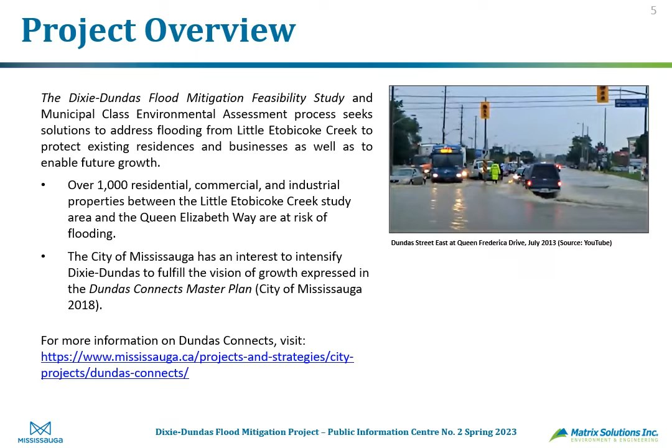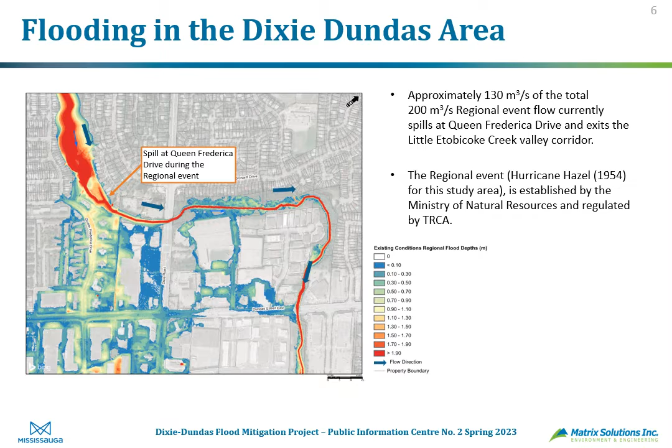During a regulatory event, the extent of flooding associated with a spill from Little Etobicoke Creek is shown on the map to the right near Queen Frederica Drive. The flooding extent shown on the map was determined and detailed through regional flood mapping, which is dictated by the Ministry of Natural Resources and Forestry and regulated by the Toronto and Region Conservation Authority. The analysis indicates about 1,000 residential, commercial, and industrial properties are at significant flood risk during the regulatory storm. As well, this flood risk was only mapped as far as the QEW. Flooding is anticipated to continue beyond the QEW, further south, to make its way out to Lake Ontario.

The objectives of the Dixie-Dundas Environmental Assessment Project can be summarized in a statement. Residents and businesses in the Dixie-Dundas community are currently highly vulnerable to flooding from Little Etobicoke Creek. The Dixie-Dundas Flood Mitigation Feasibility Study and Class Environmental Assessment will assess solutions to provide flood protection to residents and businesses, as well as enable future growth. It is our hope that the environmental assessment achieves the following objectives: address riverine urban flooding issues, protect and enhance a natural environment, build resilient and adaptable solutions, plan and design feasible infrastructure solutions, and enable growth and development.

Two-dimensional modeling to define the very complex flooding that occurs in the Dixie and Dundas areas began as early as 2012 and was completed around 2015. In July 2013, a significant flooding event did occur in the Dixie and Dundas areas, highlighting the need for further understanding of the potential flood extent. An expansion of the initial two-dimensional modeling to define flooding from the Dixie and Dundas areas down to the QEW was completed as part of the Little Etobicoke Creek Flood Evaluation Study and Master Plan in 2018. This led to the current project, the Class Environmental Assessment, which began in April 2019.

Matrix completed the feasibility portion of the project between April 2019 and July 2020, and the first PIC was held online in August 2020. As the project evolved, there was a need to expand the study area. That brings us to where we are today, which is PIC number 2.

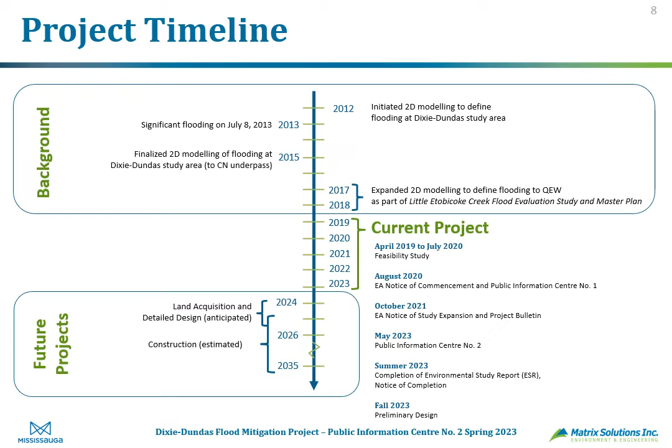There are many components of construction that are set to begin in 2026 that are estimated for completion by 2035.

This slide outlines the municipal class environmental assessment process, specifically the 5 phases associated with the process. Currently, the Dixie-Dundas Environmental Assessment Project is in Phase 3 of the Schedule C Municipal Class Environmental Assessment process. The project team has developed alternative design concepts for the preferred alternative solutions selected during Phase 2, and has decided on a preliminary preferred design solution based on the evaluation criteria.

The main intent of this PIC is to explain the alternative design concepts and the preliminary preferred design solution in order to gain feedback.

Following this PIC, the project team will complete an environmental study report that will summarize the entire process and the inputs into the process, which is Phase 4. The preliminary design, as outlined earlier, is anticipated to begin in the fall of 2023, which is Phase 5.

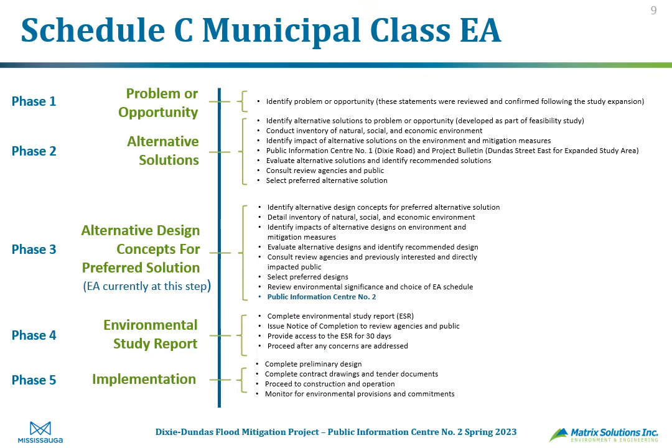There have been 2 points of public feedback leading up to this PIC. PIC number 1 was presented in August 2020 and introduced the project and the identified problem, described the environmental context, presented alternative solutions to address the problem, outlined the evaluation criteria, and provided opportunity for interested parties to offer input.

A project bulletin was released in October of 2021. The bulletin outlined the need to expand the study area for the environmental assessment, as the solution to mitigate the flows in the Dundas area could have the potential to cause flooding further downstream. The project bulletin described the environmental context of the new expanded study area, presented alternative solutions to address the secondary problem, outlined evaluation criteria, and provided opportunity for interested parties to offer input.

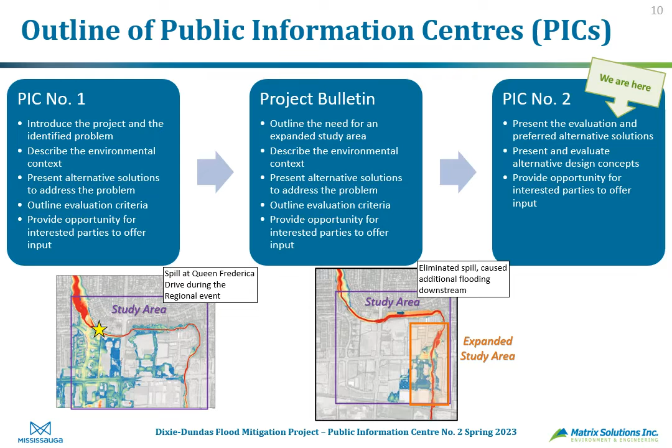Now, at PIC number 2, we will present the alternative design concepts, how they were evaluated, the preliminary preferred design solutions, and provide opportunity for interested parties to offer input. We will now review the alternative design solutions and how they were evaluated for the Dixie and Dundas areas.

Here is a recap of the alternative solutions that were presented in PIC number 1 and the project bulletin. For the Dixie area, each alternative solution represents a different approach to maintain flow within the Little Etobicoke Creek Valley Corridor, combined with the replacement of the Dixie Road Bridge.

Alternative Solution 1, Improved Conveyance with a Minimized Footprint, includes a concept that creates a narrow and deep channel through the Dixie area. The channel top width would not be increased, however the upstream 600 meters of channel would be lowered by 1 meter on average. The Dixie Road Bridge would be replaced with a single-span 26-meter bridge.

Alternative Solution 2, Improved Conveyance by Making Room for the Creek, is modeled on natural channel design concepts, with a widened channel and lowered adjacent ground to create a much wider and better connected floodplain. The channel top width would increase, and the channel depth would be lowered along with the surrounding areas to better connect the floodplain. The concept of Alternative Solution 3, Flood Containment with Mitigation for Upstream Impacts, is to contain the regional event within the Valley Corridor using a flood protection landform, known as an FPL.

The FPL would extend from approximately 500 meters upstream of Dixie Road to 700 meters downstream of Dixie Road. This option would require quite a wide footprint area due to the shallow slope on the dry side of the FPL. Alternative Solution 4 is to do nothing.

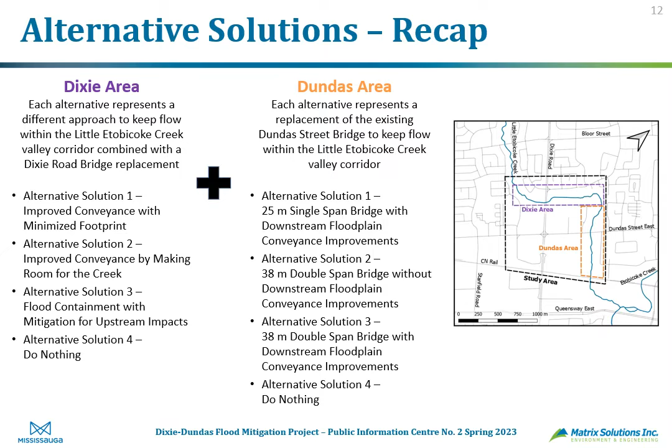Alternative Solution 2 would be to replace the Dundas Street Bridge with a 38-meter double-span bridge without downstream floodplain conveyance improvements. Alternative Solution 3 would replace the Dundas Street Bridge with a 38-meter double-span bridge with downstream floodplain conveyance improvements. And Alternative Solution 4 is to do nothing.

Each alternative solution, including the do-nothing approach, was evaluated based on the following criteria. Technical criteria, which include flood risk improvement, urban drainage impacts such as storm sewers and outfalls, increased erosion potential, construction approaches, and climate change resiliency.

Economic criteria, which include capital costs, operation and maintenance costs, urban development, and municipal servicing considerations. Environment criteria, which include aquatic ecology, terrestrial ecology, and geomorphology.

And social criteria, which include policy and planning considerations, public input, property impacts, public disruption, parks and recreational amenities, cultural heritage, and archaeological and First Nations input.

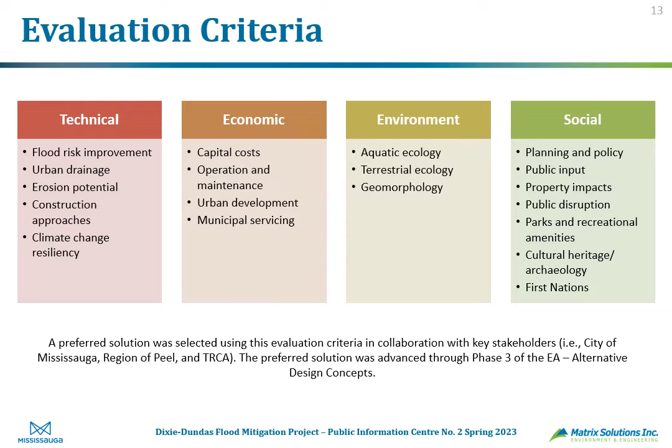Consultation is an essential part of the municipal class environmental assessment process. The City of Mississauga wants to ensure that anyone with an interest in the study has the opportunity to provide input as the study proceeds.

There have been over 200 views of the PIC No. 1 presentation and the project bulletin that were previously posted online. In general, the comments received to date from the public have expressed support for the flood mitigation solutions presented for the Dixie-Dundas area. Toronto and Region Conservation Authority and the Regional Municipality of Peel have participated in ongoing project collaboration and provided input into the project.

Cambium Indigenous Professional Services, one of our partners on this project, continues to lead the project engagement with Indigenous communities. The project team continues to have ongoing consultation with Indigenous landowners, as well as ongoing coordination with other City of Mississauga initiatives, including the Bus Rapid Transit Project.

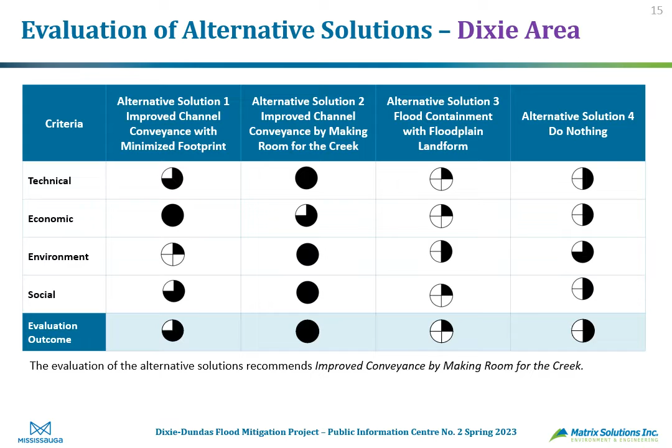The evaluation outcomes show that alternative solution 2, improved channel conveyance by making room for the creek, is the most preferred solution. Further details of the evaluation assessment will be included in the forthcoming environmental study report.

The proposed design for the Dixie area preferred alternative solution, which is alternative solution 2, improved conveyance by making room for the creek, would incorporate natural channel design concepts, create a wider and better connected floodplain, and replace the Dixie Road Bridge with a larger span structure.

From a technical perspective, the preferred alternative solution would eliminate the spill at Queen Frederica Drive, reduce water levels upstream of Dixie Road, reduce erosion during typical flow conditions, and provide resiliency to protect against climate change through reduced water levels. From an economic perspective, this preferred alternative solution would enable future removal of the Special Policy Area designation,

would be similar in cost to alternative solution 1, and lower in cost than alternative solution 3. The design would reduce the required road raise with a lower overall bridge replacement cost. There would be some impacts to municipal servicing that would require relocation, but no more than the other two design alternatives.

Environmentally, the preferred alternative solution would require the most tree removals. However, it would provide the most opportunity for long-term improvements to fish habitat and terrestrial aquatic interface, and would improve sediment transport processes. Socially, the preferred alternative solution would create the most opportunity for recreational and trail improvements and would align with current City of Mississauga planning and policy initiatives.

Some property acquisition would be required, and some disruption during construction at Dixie Road is anticipated, but less so than the other design alternatives. Overall, alternative solution 2 was chosen as the preferred alternative solution because it would contain the spill and provide the most improvements from a social and long-term environmental perspective when compared to the other alternative solutions, and it is similar in cost to alternative solution 1.

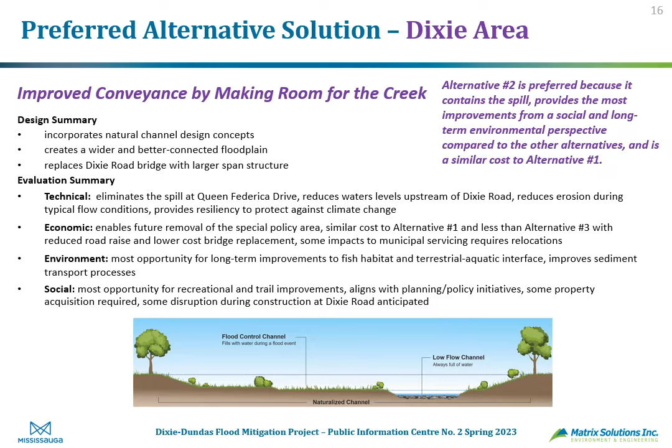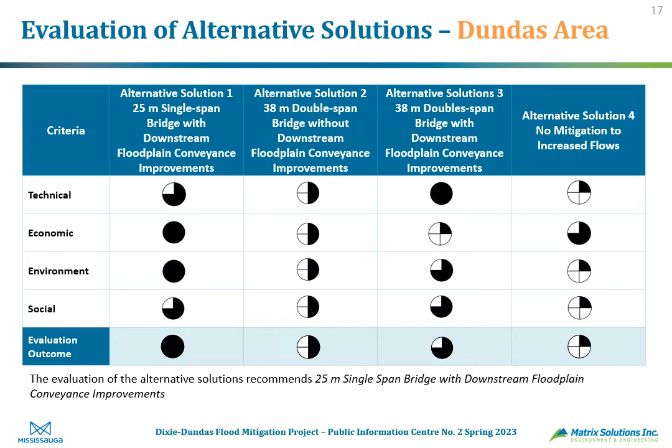The evaluation outcomes show that alternative solution 1, a 25-meter single-span bridge with downstream floodplain conveyance improvements, is the most preferred option. Further details of the evaluation assessment will be included in the forthcoming environmental study report.

The preferred alternative solution for the Dundas area is a 25-meter single-span bridge with downstream floodplain conveyance improvements. This solution would replace the Dundas Street Bridge with a wider single-span bridge and create a wider and better connected floodplain downstream of Dundas Street.

From a technical perspective, the preferred alternative solution contains the flood within the valley corridor, with lower water levels downstream of the bridge than alternative solution 2. It is also the least challenging to implement with ongoing infrastructure initiatives on Dundas Street.

Environmentally, a single-span bridge provides the most ecological and geomorphic benefits as compared to alternative solutions 2 and 3, which contain piers, and it would provide some terrestrial connectivity improvement through the bridge opening and downstream.

Economically, the preferred alternative is the least expensive bridge replacement, with less operation and maintenance required than alternative solutions 2 or 3, and it would enable future removal of the special policy area designation and allow future urban development plans to move forward.

Socially, the preferred alternative would require some property acquisition near Dundas Street, and it would impact adjacent property owners and businesses during construction. However, it would provide an aesthetic improvement and some future recreation opportunities.

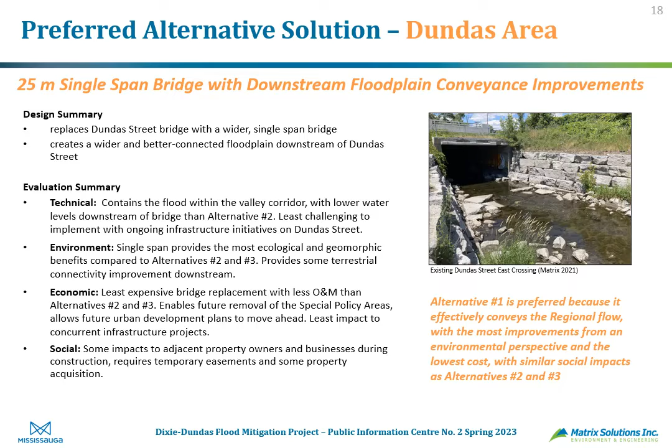Overall, alternative solution 1 was chosen as the preferred design because it effectively conveys the regional flow, it has the most improvements from an environmental perspective, it has the lowest cost, and it has similar social impacts as alternative solutions 2 and 3. For the Dixie area, alternative solution 2, improved conveyance by making room for the creek, was selected to mitigate the spill at Queen Frederica Drive.

This solution would contain the spill within the valley corridor through the Dixie area, but the additional flow would cause flooding downstream at Dundas Street. The critical conveyance issue at Dundas Street is the undersized Dundas Street Bridge.

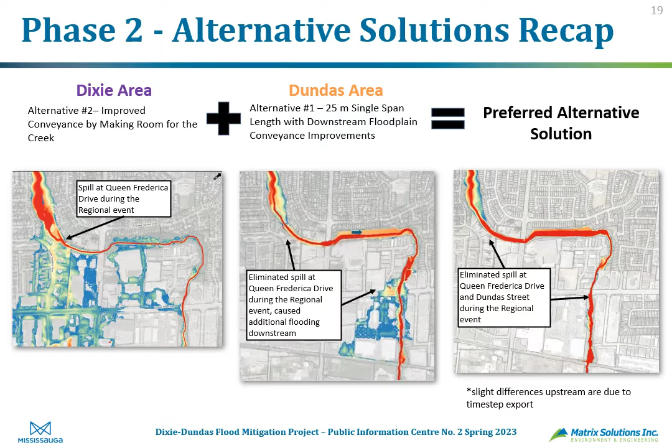The alternative solution selected for the Dundas area is a 25-meter single-span bridge with some downstream flood conveyance improvement. Together, these two preferred alternative solutions would keep flows within the Little Etobicoke Creek Valley corridor and allow the removal of the special policy area designation. Now that the preferred alternative solutions have been selected, we will review alternative design concept considerations.

Key design considerations for the Dixie area include the following: how much creek invert lowering would be required through the channel to convey the required flows? What municipal servicing infrastructure would need to be moved or protected in place? What would be the best span for the Dixie Road Bridge replacement to facilitate all the objectives of the environmental assessment? And, with that in mind, should the Dixie Road raise be minimized or eliminated completely?

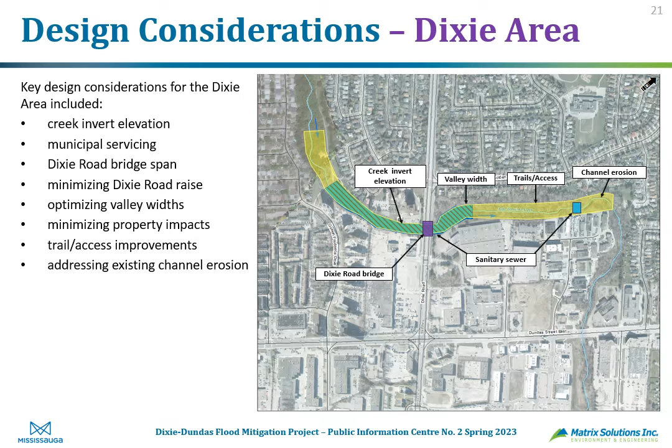In terms of the channel, the city wants to optimize the valley width with as minimal property disturbance as possible, to improve trails through the area and improve access from a variety of points throughout the corridor, and to address any existing channel erosion in the study area.

The first component reviewed was the creek invert elevation under Dixie Road. The first alternative investigated was to maintain the existing channel invert under Dixie Road. This alternative was screened out as it would not be possible to achieve the hydraulic capacity needed through the bridge without lowering the channel.

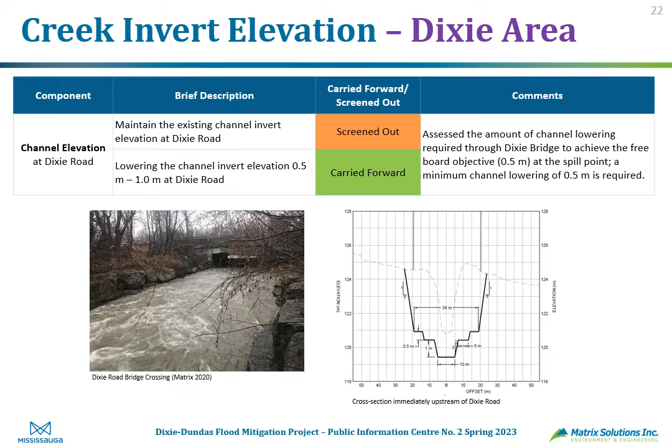The second alternative investigated was the option to lower the invert of the channel by a minimum of 0.5 meters and up to 1 meter at the Dixie Road crossing. The design consideration was carried forward as it would achieve the freeboard objectives of this spill point.

The second component reviewed was municipal servicing, particularly the 900mm sanitary trunk sewer that crosses under Dixie Road. The sanitary sewer is currently within 0.6 meters of the creek bed. Because the channel needs to be lowered by at least 0.5 meters to achieve the objectives, leaving the sanitary trunk sewer in place was screened out.

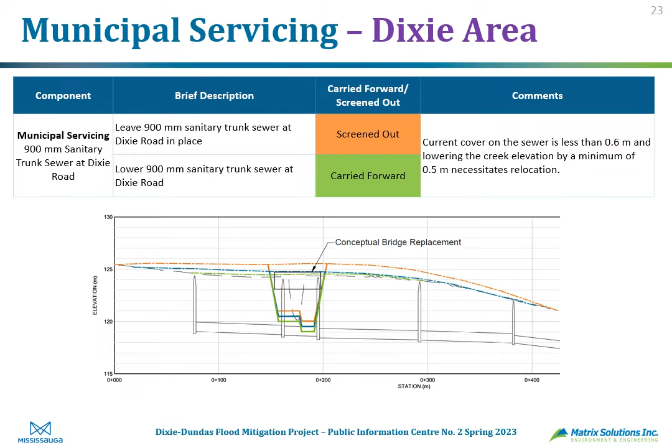The design consideration to lower the 900mm sanitary trunk sewer was carried forward. Some preliminary analysis was completed to show how the sewer could be lowered and connected into the existing system above Dundas Street.

Another piece of municipal servicing reviewed was the 450mm sanitary sewer that crosses Little Etobicoke Creek near Jarrow Avenue. In its current condition, the 450mm sanitary sewer is visible along the creek bed, which leaves it open to environmental risk. In discussions with the Region of Peel, keeping the sewer as it is for an undetermined amount of time is not a feasible option.

Leaving the sewer in place also limits the opportunity for improved floodplain and channel conveyance. Therefore, this opportunity was screened out.

Two main options were reviewed to relocate the 450mm sanitary sewer. The first option would be to realign the sewer through the creek floodplain along the north side and connect it to the lowered trunk sanitary sewer at Dixie Road. This alternative was ultimately screened out as it would require additional lowering of the 900mm sanitary trunk sewer, and future maintenance and access within the floodplain would be an issue.

The other option would be to lower the 450mm sanitary sewer, maintain its current alignment through Jarrow Avenue, and connect it upstream of Dundas Street. The analysis showed that this lowering would be possible, and it is the most feasible solution, as it would maintain a sewer alignment and allow access through existing easements. This option was carried forward.

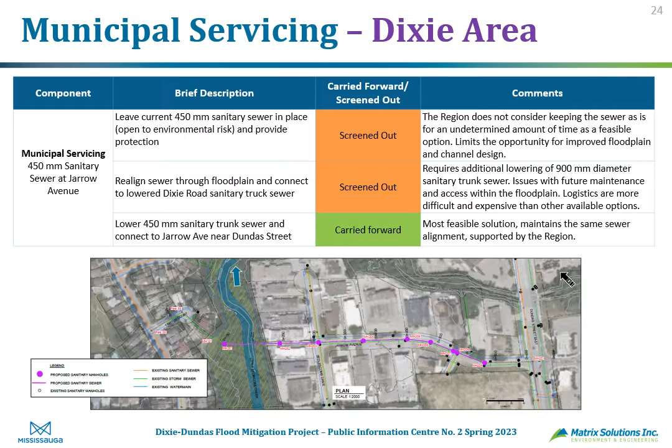Another design consideration was the Dixie Road bridge span. For the alternative solutions previously evaluated, a 45-meter double-span bridge with a lower 0.5-meter invert design was used. This design concept could work hydraulically, however there are ways in which the bridge span and resulting impacts and opportunities could be optimized. Additional bridge spans were evaluated, all of which included lowering the channel by up to 1 meter at Dixie Road.

The first solution evaluated was a 38-meter double-span bridge. This option is the minimum span that would meet hydraulic requirements. The second solution evaluated was a 45-meter double-span bridge, but with a 1-meter lowered channel invert.

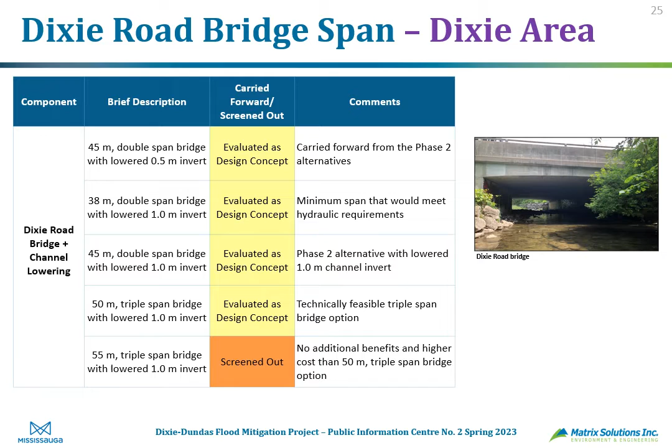The third solution evaluated was a 50-meter triple span bridge, which is the most technically feasible triple span bridge option. A 55-meter triple span bridge was also evaluated. However, it would provide no additional hydraulic benefits and would cost more than the 50-meter triple span bridge, which led to it being screened out. The remaining 4 bridge span solutions were evaluated as alternative design concepts and are described later in this presentation.

Some additional considerations were reviewed for all the Dixie area design concepts. The city wants to create trail and access improvements. The preferred alternative solution would require extensive tree and vegetation removals throughout the valley corridor. Landscaping would restore the construction disturbance, particularly in Willow Creek Park, which would contribute to long-term improvements.

There is a desire to enhance the city's multi-use pathway system. This includes formalizing an existing trail downstream of Dixie Road, which connects into Fieldgate Drive. The city also wants to look at enhancing the multi-use pathway upstream to the west of Dixie Road, with additional connections through the Dixie Road Bridge opening.

Additional municipal servicing infrastructure will also need to be considered. The 400mm water main at the Dixie Road Bridge currently has 1.9 meters of cover, and watermain relocation would be required. A 2.4-meter feeder main access is located underneath the creek. However, it has 20 meters of cover and would not be disturbed. Exposed concrete utility boxes are present, as well as various other utilities that would require relocation.

Within the study area, there are 10 stormwater outlets that discharge to Little Etobicoke Creek. These would need to be adjusted as the design progresses. Lastly, the creek width, grading, erosion control, and vegetation would need to be optimized to best fit the preferred alternative solution. During the detailed design stage, property requirements will be limited where possible, and steeper side slopes with geotechnical considerations would potentially be explored.

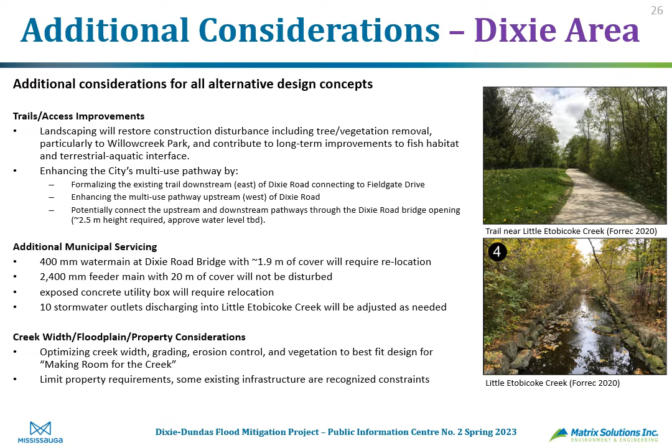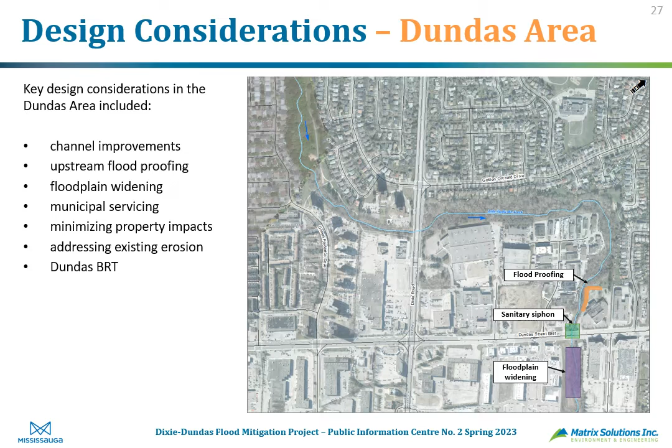Key design considerations for the Dundas area include channel improvements through the corridor, upstream floodproofing for an existing building, floodplain widening downstream of Dundas Street, municipal servicing infrastructure, minimizing property impacts, addressing existing erosion issues through the study area, and coordination with the bus rapid transit project.

An existing building on the east side of Little Etobicoke Creek, upstream of Dundas Street, will require floodproofing due to the additional flows from the mitigated spill at Queen Frederica Drive.

Three options to mitigate the flooding were reviewed. The first option is to raise the existing berm to prevent overtopping. This option could work to contain the flow within the valley corridor and protect the property from flooding.

Another option is to widen the channel immediately upstream of Dundas Street East. This option would not reduce the water level sufficiently to prevent property flooding.

Similarly, the option of moving the existing berm back 20 meters and widening the channel was reviewed. However, this option would also not reduce the water level sufficiently to prevent property flooding. Therefore, the only option carried forward is to raise the existing berm on the property.

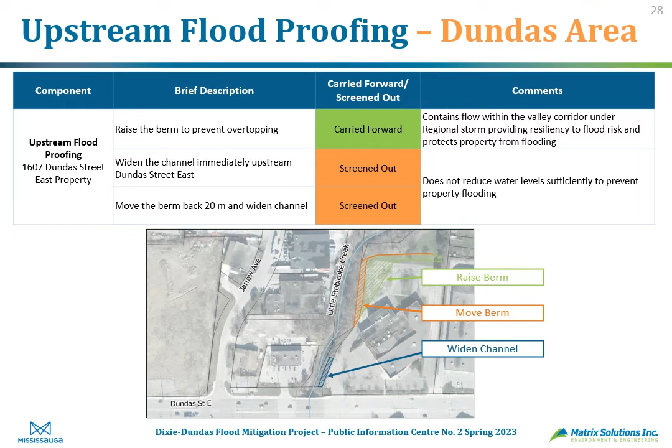The floodplain widening downstream of Dundas Street along the west bank was reevaluated during the alternative design concept process. Although the widening did show some hydraulic improvements as part of the evaluation, it may be limited hydraulically due to the confined valley system setting upstream and downstream.

A more detailed evaluation of this alternative design concept was completed to determine more holistic benefits and potential drawbacks to implementing it.

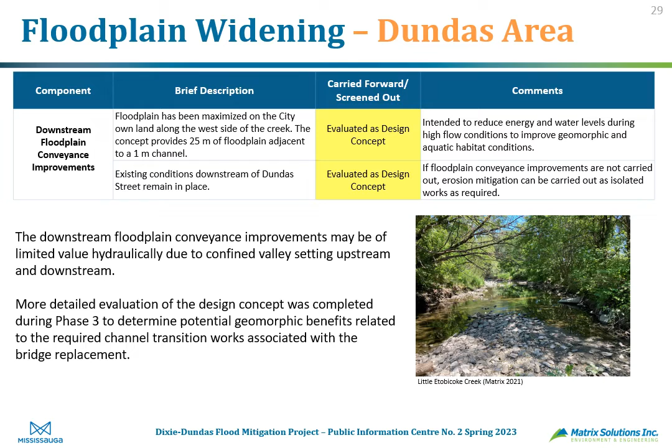Additional considerations for the Dundas area included overall channel improvements to improve habitat connectivity and geomorphology through the larger bridge structure and tie-ins up and downstream.

The works would also address existing erosion sites identified along the bed and banks as part of the technical studies work. The design concept would limit property encroachment and work within the confined valley system that exists up and downstream of Dundas. Servicing infrastructure was also identified within the study area.

This includes a sanitary siphon, which will require relocation along Dundas Street due to the bridge works. Ongoing coordination will be required for the planned construction of a 200mm diameter water main along Dundas Street.

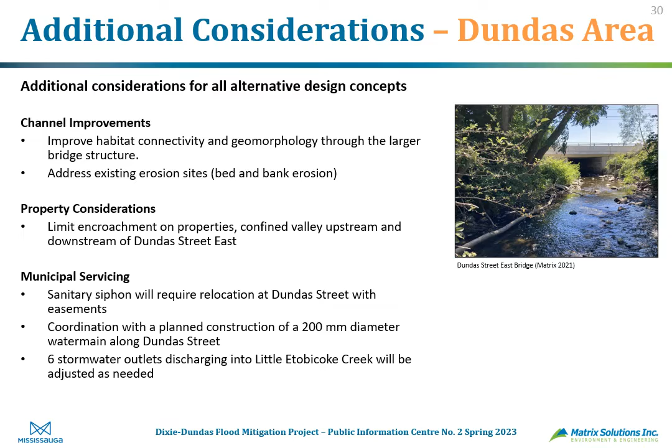Lastly, there are 6 stormwater outfalls that discharge into Little Etobicoke Creek, which will need to be adjusted as the design progresses. We will now review the evaluation of the alternative design concepts for the Dixie Road Bridge.

As described previously, there are 4 alternative design concepts for the Dixie Road Bridge replacement. These include 38, 45, and 50-meter span bridge alternatives combined with 0.5 to 1 meter of channel lowering through the crossing.

All 4 bridge alternatives provide the required 0.5 meter of freeboard during the regional event at the spill location upstream of Dixie Road at Queen Frederica Drive.

The 3 alternatives with the 1 meter channel lowering also provide 0.5 meters of freeboard at the Dixie Road Bridge crossing. The alternative solution evaluated during Phase 2 of the environmental assessment would require a road raise, whereas the 3 other design concepts would maintain the current road elevation.

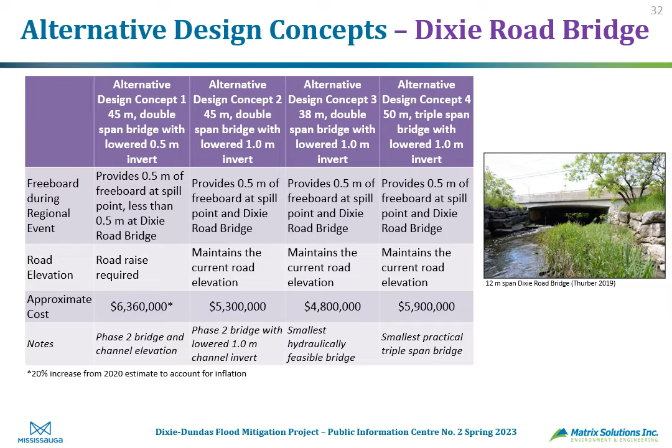All bridge alternatives have similar costs, with the lowest cost being the 38-meter double-span bridge and the highest cost being the 45-meter double-span bridge with 0.5 meter invert lowering, which is more costly due to the required road raise.

The criteria used to evaluate the alternative design concepts was based on the criteria used to evaluate the alternative solutions, with some minor adjustments made to better compare and contrast the proposed concepts. This criteria will be refined based on comments received from this PIC.

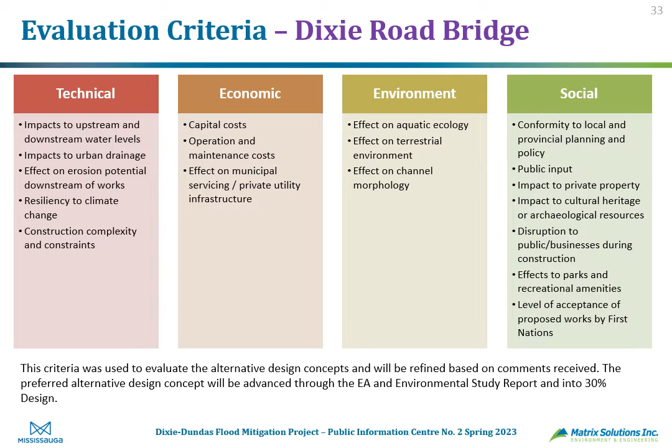The preferred alternative design concept will be advanced through the environmental assessment and into the 30% design stage. Jumping into the preliminary design concept evaluation, it should be noted that all 4 design concepts meet the objective of the environmental assessment, which is to contain the flow within the valley corridor.

Alternative Design Concept 1 would create higher water levels upstream of Dixie Road and at the spill location, giving it the lowest opportunity for climate change resiliency and adaptability.

Alternative Design Concepts 2 and 4 would create similar reductions in water levels upstream, with Alternative Design Concept 4 being the most resilient.

Alternative Design Concept 1 would be the most complex to construct due to the road raise required. There could also be more challenges with constructing Alternative Design Concept 4 due to the larger span and channel alignment.

In terms of economics, the capital costs associated with each bridge replacement were shown on the previous slide. Operation and maintenance costs would be similar, but slightly higher for Alternative Design Concepts 1, 2, and 3 due to the single pier, which could result in increased costs due to ice or debris jams during high flows.

The alternative design concepts will impact municipal servicing in the area and require the relocation of the 900 millimeter trunk sanitary sewer, the 400 millimeter water main, as well as various utilities.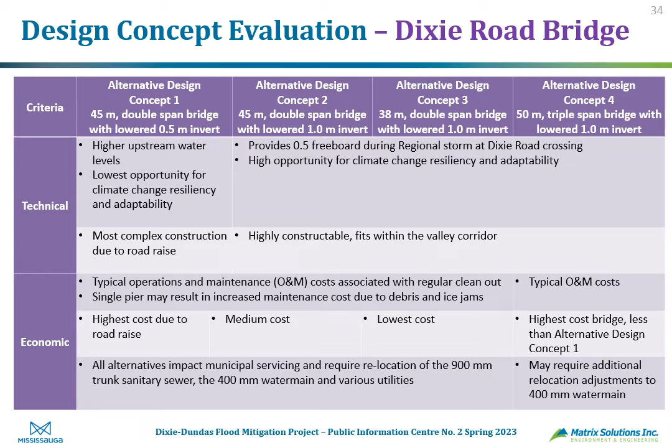Additional adjustments may be required for the alternative design concept 4 due to the larger span. All the alternative design concepts provide the opportunity to improve the aquatic and terrestrial habitat. Alternative design concepts 2 and 3 provide more opportunity due to the lower channel than alternative design concept 1.

Alternative design concept 4 provides the most opportunity for connectivity as well as improved channel alignment, which can be centered through the double piers. From a social perspective, temporary easements and property acquisition would be required on the north and south banks for all design concepts.

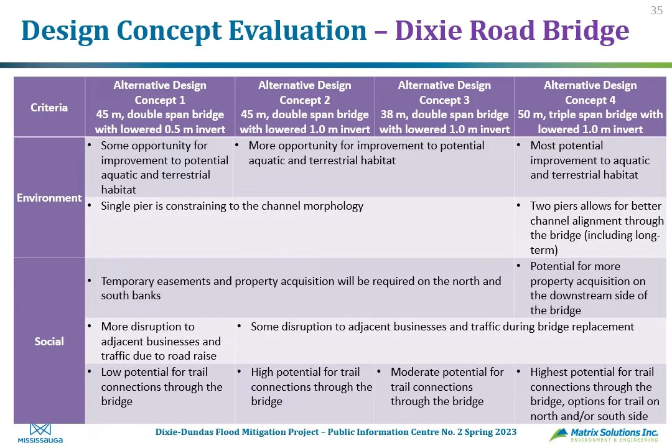There is potential for more property acquisition to be required for the 50-meter span bridge to align the creek in the valley corridor. Design Concept 1 will cause the most disruption to the public due to the required road raise. With respect to trail connections, Alternative Design Concept 4 has the most potential to accommodate the requested trail connections on either side of the channel, whereas the 3 other design concepts would be constrained to one side of the pier.

The preliminary evaluation of the alternative design concepts is summarized visually in the table. For technical criteria, Alternative Design Concept 4 is the most preferred, followed by Alternative Design Concept 2. For economic criteria, Alternative Design Concept 3 is the most preferred, followed by Alternative Design Concept 2.

For environmental criteria, Alternative Design Concept 4 is the most preferred, followed by Alternative Design Concept 2. For social criteria, Alternative Design Concepts 2 and 3 have equal preference, followed by Alternative Design Concept 4. As shown in the scoring, Alternative Design Concepts 2, 3, and 4 have similar overall evaluation outcomes, with Alternative Design Concept 4 being slightly preferred over the others.

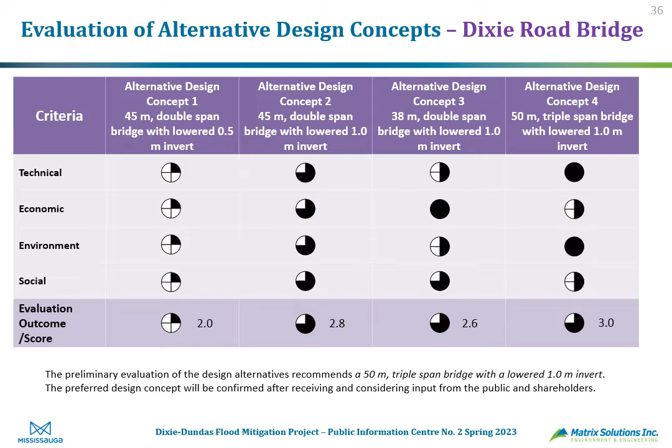The preliminary preferred design concept will be confirmed after receiving and considering input from the public and stakeholders. The evaluation summary for the preliminary preferred design concept is outlined on this slide.

Without going into all the details, as they have been explained through the previous slides, ultimately the 50-meter triple span bridge with lowered 1-meter invert is preferred because it provides the most improvements from a technical and environmental perspective, with similar social benefits to Alternative Design Concepts 2 and 3.

It would cost more than alternative design concepts 2 and 3, but would be the most resilient and adaptable solution, providing flexibility to vary the channel invert during detailed design.

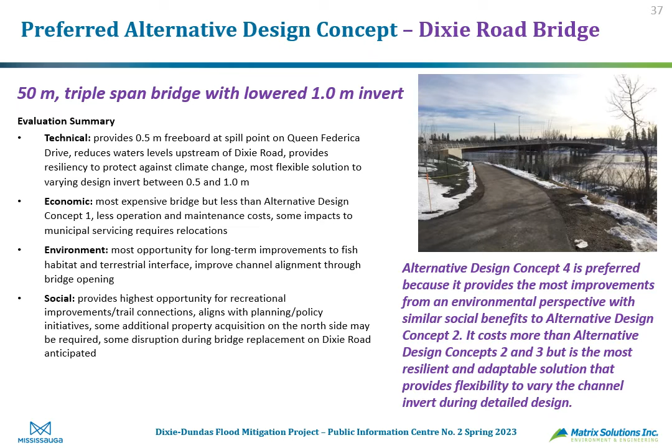We will now review the alternative design concepts for the Dundas area. Two alternative design concepts were evaluated for the Dundas area. The first was maximizing the floodplain area downstream of Dundas Street.

It should be noted that regardless of this alternative being selected, channel works are still required upstream of the Dundas Street Bridge, as well as through the bridge area to facilitate a stable transition.

The comparison alternative would be completing no floodplain improvements downstream, also known as the do-nothing scenario, for the floodplain conveyance. The existing floodplain conditions would remain downstream of Dundas Street.

Channel works would still be required upstream of the Dundas Street Bridge, as well as through the bridge area to facilitate a stable transition. Downstream, the existing erosion sites are not addressed, and restoration would need to be completed as isolated works.

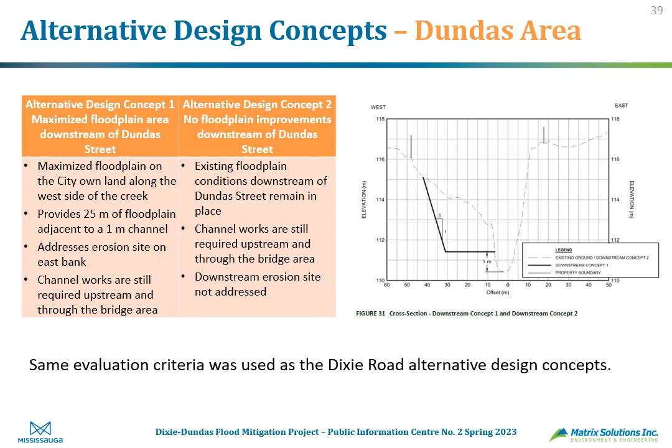We will now go through the alternative design concept evaluation for the Dundas area. Looking at the technical criteria, there would be minor improvements to water levels upstream of Dundas Street with the floodplain widening. There could be more improvement to the water levels downstream of Dundas Street. However, this would only extend for approximately 200 meters where the floodplain works would take place.

There would be improvement to erosion potential, specifically in the area of floodplain widening and channel restoration. These channel and floodplain modifications would provide additional resiliency against future climate change. Some challenges with implementing alternative design concept 1 include the need to have access granted through an easement and the challenging steep valley grades.

Alternative design concept 1 has the highest capital costs, but fewer future operation and maintenance costs, as erosion conditions through the valley would be improved over the long term. Implementing alternative design concept number 1 would also reduce the need to complete the required erosion works in isolated projects.

Alternative design concept 2 would result in higher long-term operation and maintenance costs, as the erosive conditions would be left to continue. Alternative design concept 1 would require adjustments to an existing stormwater outfall.

Alternative design concept 1 would create improved geomorphic, terrestrial, and aquatic conditions downstream of Dundas Street. Socially, both design concepts are anticipated to have high acceptance by planning and policy agencies. Concept 1 would require a temporary easement during construction but no property acquisitions. There could be some disruption to adjacent landowners, though this is expected to be minimal compared to the planned bus rapid transit project construction. Concept 1 would improve aesthetics and leave some potential for trail access and connections.

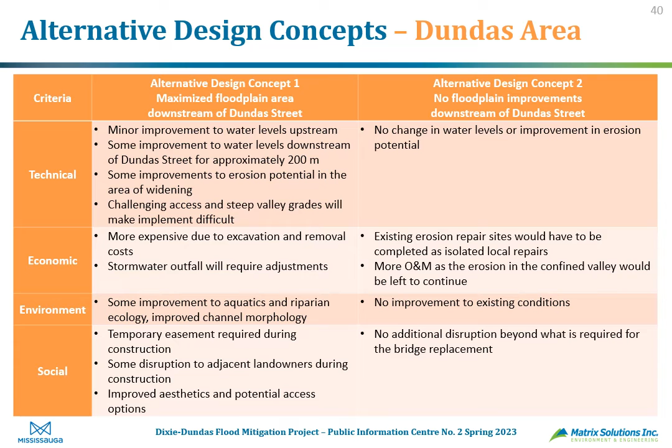Preliminary evaluation of the alternative design concepts is summarized visually in the table. For technical criteria, concept 1 is preferred over concept 2. For economic criteria, concept 2 is preferred over concept 1. For environmental criteria, concept 1 is preferred over concept 2. For social criteria, concept 2 is preferred over concept 1. As shown in the scoring, the alternative design concepts have similar overall evaluation outcomes, with concept 1 preferred overall. The preliminary preferred design concept will be confirmed after receiving and considering input from the public and stakeholders.

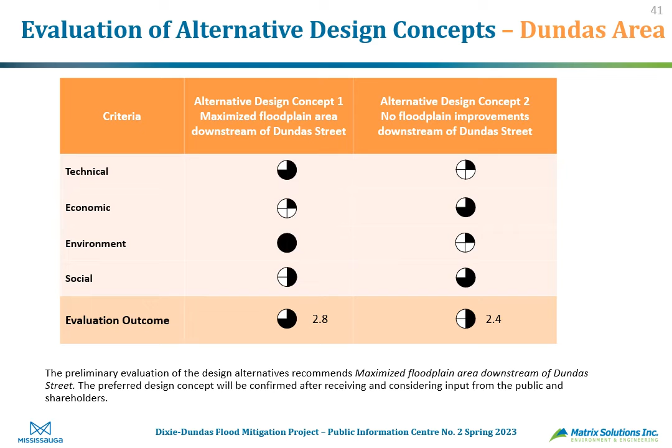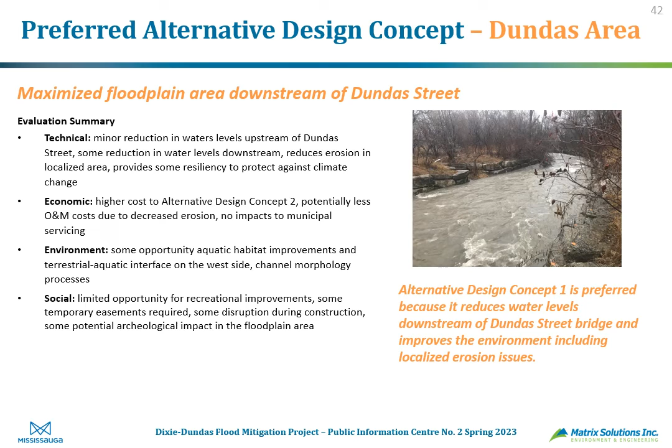The evaluation summary for the preliminary preferred design concept is outlined on this slide. Without going into all the details, as they've been explained through previous slides, ultimately the maximized floodplain area downstream of Dundas Street is preferred because it reduces water levels downstream of the Dundas Street Bridge and improves the environment, including localized erosion issues. Let's review the overall preliminary preferred design concepts and the next steps of the environmental assessment.

The overall preliminary preferred design concept for the Dixie area is shown in this figure. Floodplain restoration and channel conveyance improvements would happen throughout the entire corridor, from upstream of Dixie Road to the downstream bend. The channel would need to be lowered between 0.5 meters and 1 meter, particularly in the area of Dixie Road. This channel lowering would require lowering the 900 millimeter trunk sanitary sewer under Dixie Road, as well as the sanitary sewer crossing near Jarrow Avenue.

The Dixie Road Bridge would be replaced with a new 50-meter triple-span bridge. Valley widths through the corridor will be optimized to minimize property takings where possible. Trail connections are proposed through the valley and underneath the new Dixie Road Bridge. The construction works would require tree removal and regrading, followed by a period of construction and planting, and then restoration.

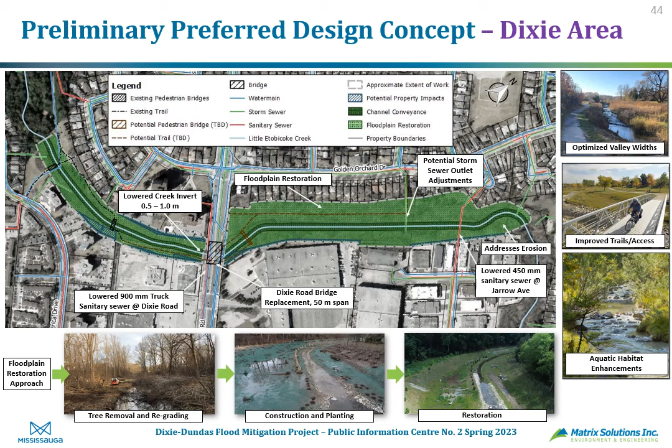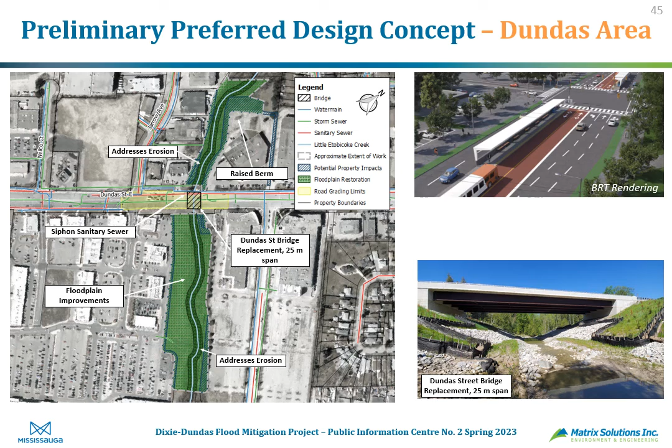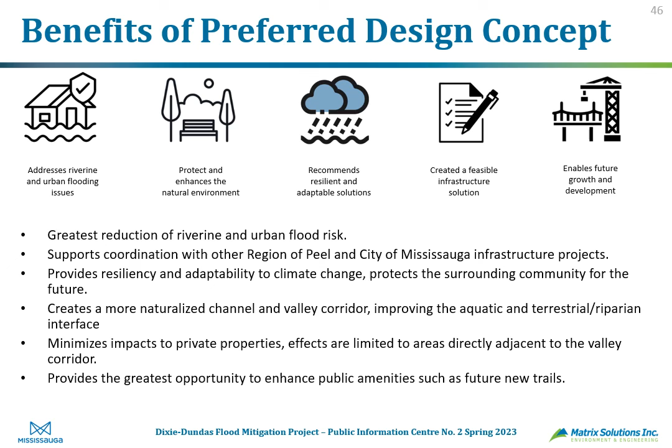Making room for the creek creates a more naturalized channel and valley corridor, improving the aquatic and terrestrial interface. Where possible, the design would minimize impacts to private properties, and effects would be limited to areas directly adjacent to the valley corridor. This design is a feasible infrastructure solution that would enable future growth and development for the City of Mississauga and Region of Peel.

The next steps in the environmental assessment process include integrating input from stakeholders and reviewing the alternative design concepts to select the preferred concept. The project team will then work toward completing the environmental study report, planned to be issued this summer for a 30-day review period. Preliminary and detailed design will be completed throughout the remainder of 2023 and continue into 2025. Construction is anticipated to start in 2025 with the bus rapid transit and Dundas Street Bridge replacement. Work will generally be completed from downstream to upstream to properly accommodate the increased flows once flooding is contained within the channel.